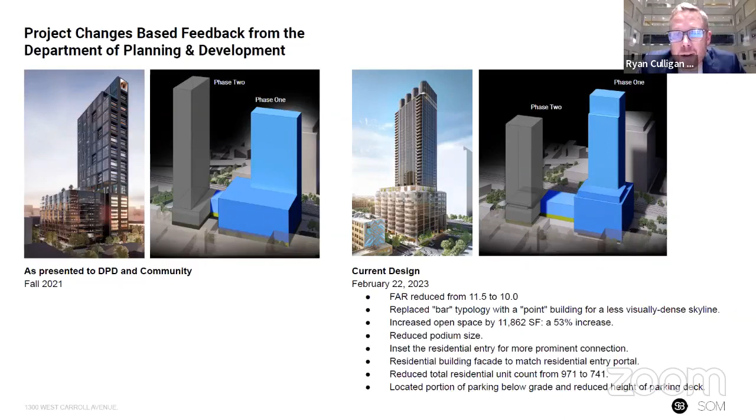And a portion of the parking has been relocated to below grade as a way to improve the public realm.

The project is positioned in the northwest corner of the Fulton Market District. It's bordered on the west by Ada Street and Ogden, on the south by Carroll Avenue, and on the east by Elizabeth. To the north are the Metra tracks.

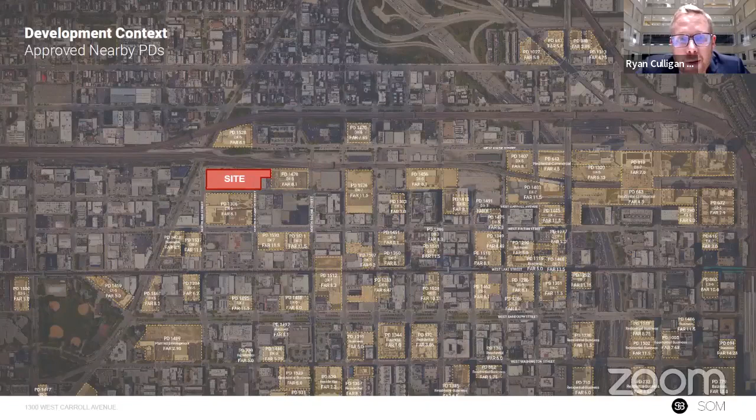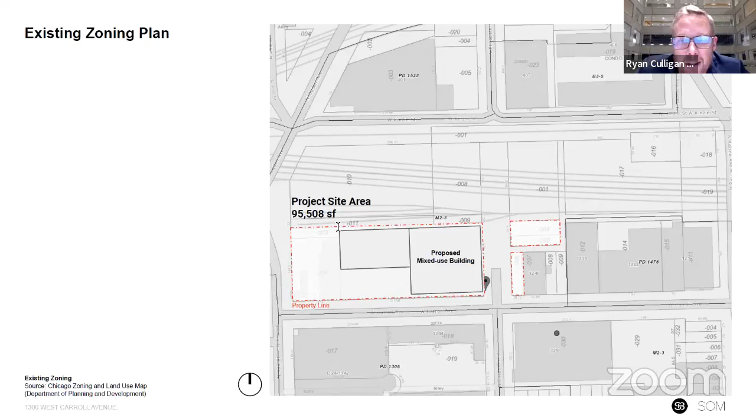We're proposing a phased mixed-use development. There would be 2 phases for this project, and the design you're going to see tonight focuses on phase 1, the first phase we propose to build. That phase is biased to the east and north of the site, as shown in this diagram, and it's a mixed-use building that includes at the ground floor some retail, lobbies, amenities, a residential rental building, and an office building on the south of the site. We'll talk a little bit about what those designs look like.

With respect to the massing and site planning for the development, we've created a few images that give context to the bulk and form of the development within the neighborhood, showing both existing and approved planned developments. One of the things we've endeavored to do, and are quite happy with the results, is to shape the buildings, the skyline presence, and their roofscapes to key into key datums in the surrounding context.

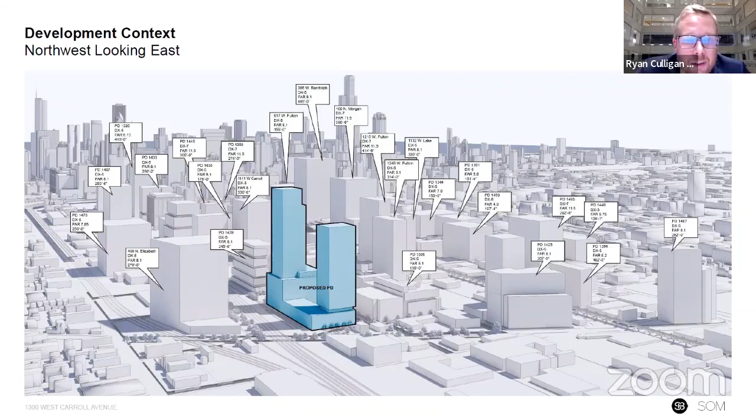The buildings step down towards the west as they move towards Ogden. They're spaced as far apart as they can be on the site to create as much air and light between them. That light is driven down to the public realm. And the buildings are compact in shape to create points on the skyline rather than walls on the skyline.

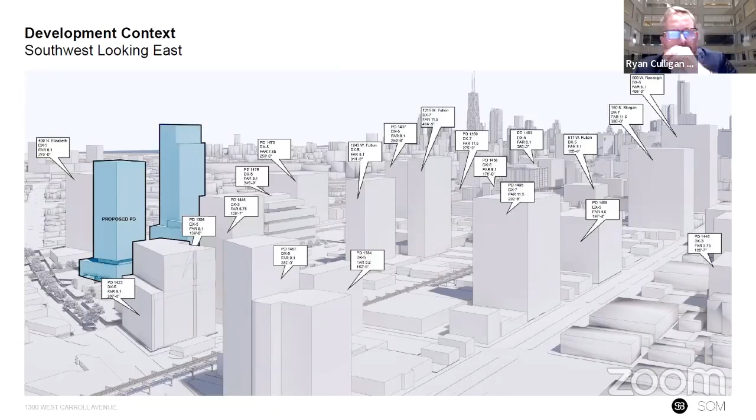The site has gone through some significant developments, we think, for the betterment of the public and the vitality of the pedestrian environment along Carroll and Elizabeth. On the left, you can see the site plan presented back in fall of 2021. I'm going to train your eye to a few things to orient everybody: Elizabeth Street to the right, the tracks off the page to the north, Carroll to the south, and Ada to the west.

The light blue color is the proposed phase 1 development, and the darker blue color is the proposed phase 2 development. On the left is what we had shown a couple of years ago, and on the right is what we propose tonight.

One of the big differences that has developed, in conversation with both the community and with officials from the Department of Planning and Development, has been the increase of the public realm. The plaza you can see here is significantly larger now than it was before, as these buildings have been moved further apart.

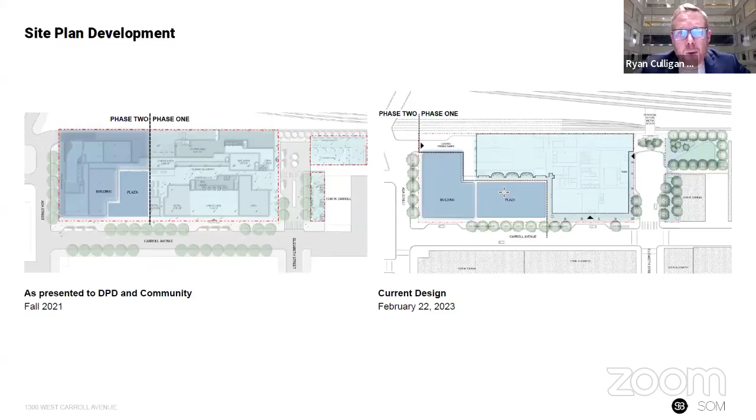To talk a little bit about the functions of the ground floor, you can see that in phase 1, part of the development will be a new pocket park accessible to the public off of Elizabeth Court. A sizable pedestrian sidewalk connecting Carroll to that park is part of this design proposal.

To the west of Elizabeth Court would be the phase 1 development and the above-grade structure. An office building would be accessible from the south off of Carroll, and the residential entrance tucked more quietly on the edge of Elizabeth Court.

All vehicles, that's all passenger vehicles and all service vehicles, will intentionally be brought in from the northwest corner of the site. This is done to make the pedestrian and public realm surrounding the entire development as safe as possible. You can walk from edge to edge across the entire site, all the way to the Elizabeth Green, without ever having to cross traffic. This is one curb cut on the northwest.

I'm going to bring us all from the ground up through the typical levels of the development to explain where the program is, the different uses, and how they work. One thing to keep in mind, and we'll talk a little bit about this in the coming slides, is that as a project team we've endeavored to create public, active front-of-house uses.

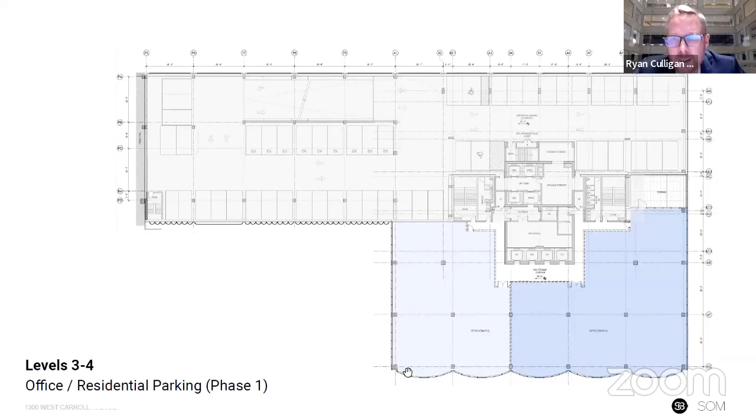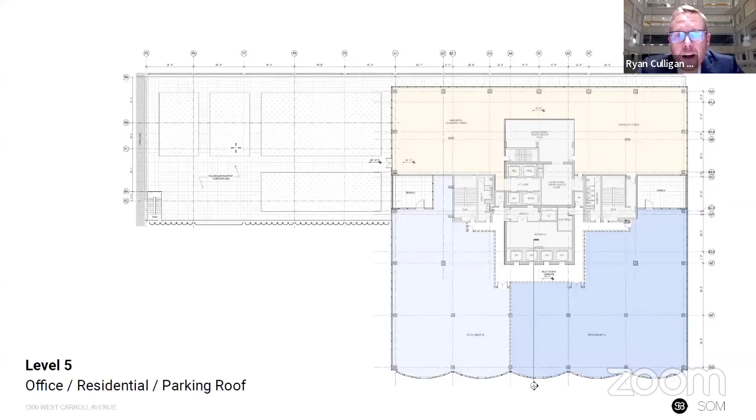Once we get above the parking podium, the footprint of the building that rises above is split in its use. It's a true mixed-use building with office on the south and residential amenities on the north. Building tenants would have access out onto the rooftop of this parking podium.

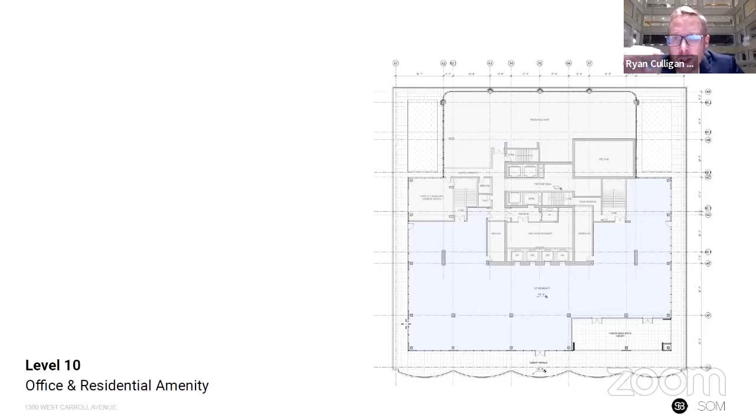We've tried at every step along the way to design in accordance with the West Loop design guidelines, and we've highlighted a few of the guidelines which we think really strongly incorporated into the DNA of this project.

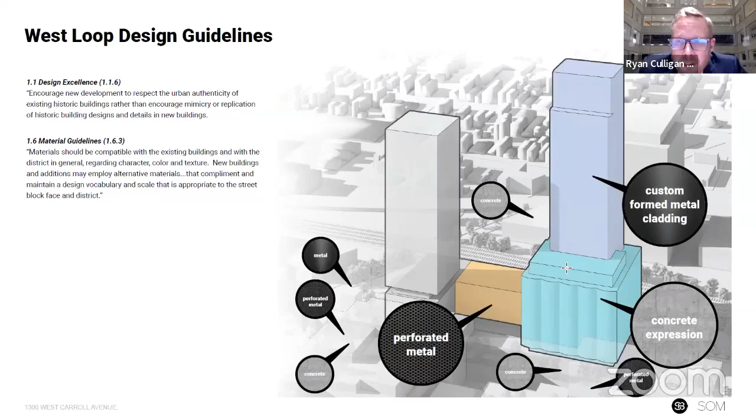One of the ways that we are in accordance with the West Loop design guidelines is through material. The guidelines call for a respect for urban authenticity and the existing historic character of the neighborhood. The site, a former Archer Daniels Midland wheat mill, has also informed our material selection. Different elements of the project use a concrete expression, a metal formed cladding expression, or perforated metals. We think this palette of materials is both respectful of the site's history and quite compatible with the surrounding neighborhood.

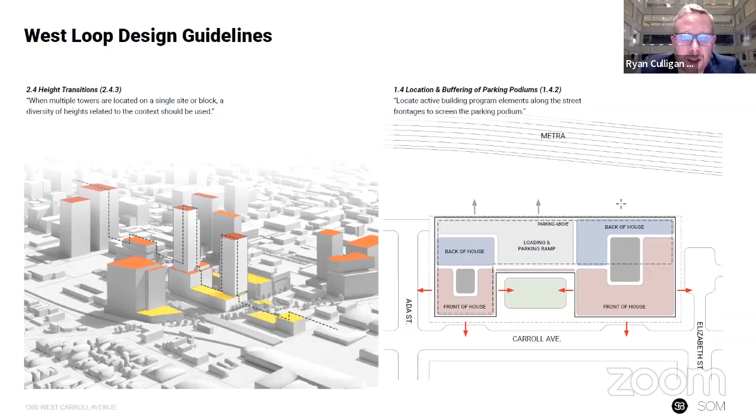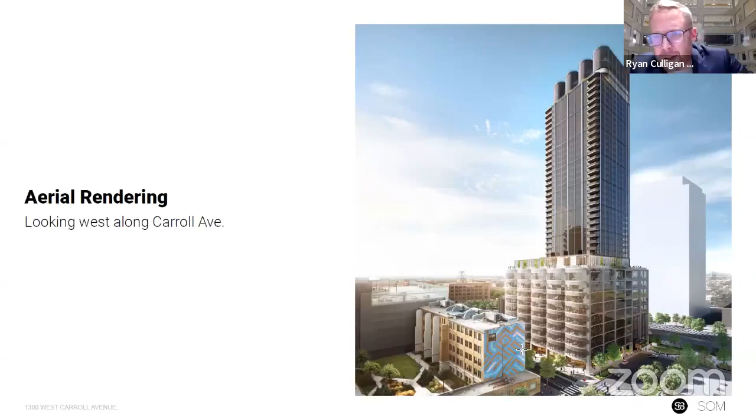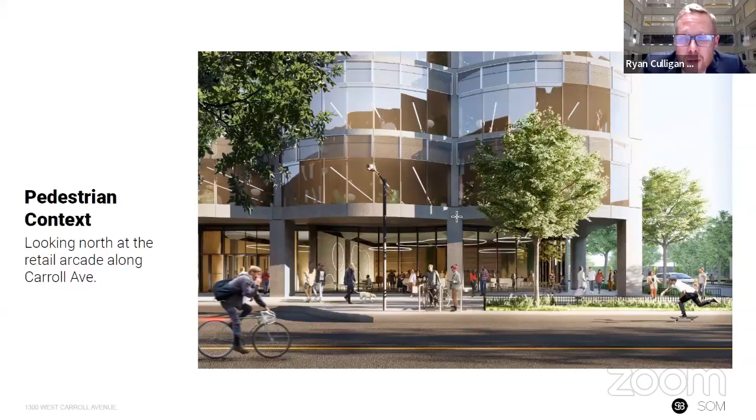Here's an elevational detail of the office building we're proposing, with bay windows reminiscent of the silos from the site's past. That concrete expression—raw, but we think also refined materiality—is intentionally relating to the neighborhood context, and we think it belongs to the neighborhood in a way that is complementary and respectful.

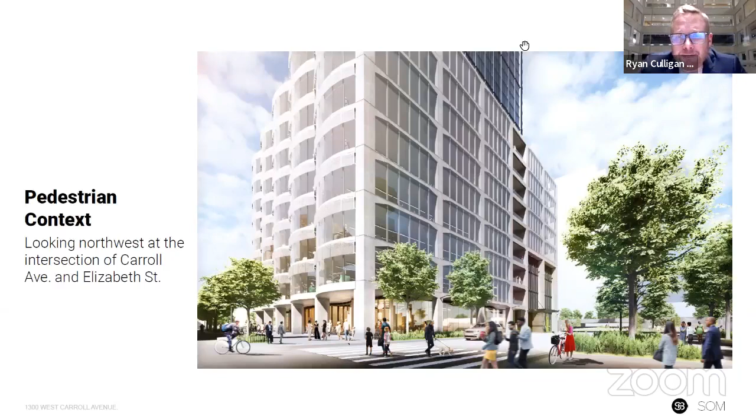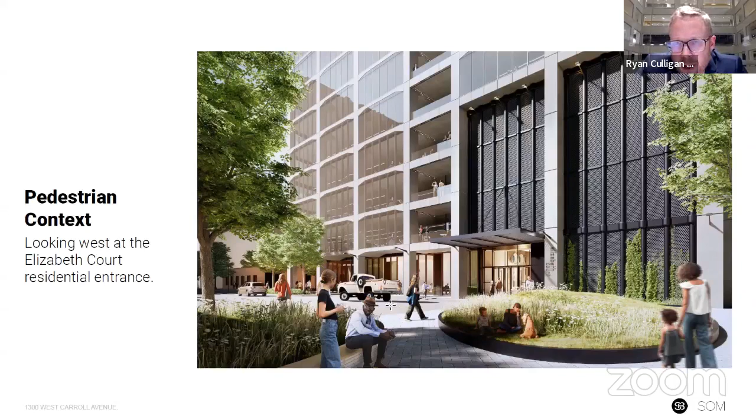Over our back right shoulder is the provision for a potential connection to a future Metra station, to the north of the development, outside the property line. The design for this pocket park has been done such that it is conducive to recreational activities, picnics, as well as the incorporation of diverse native grasses and plantings.

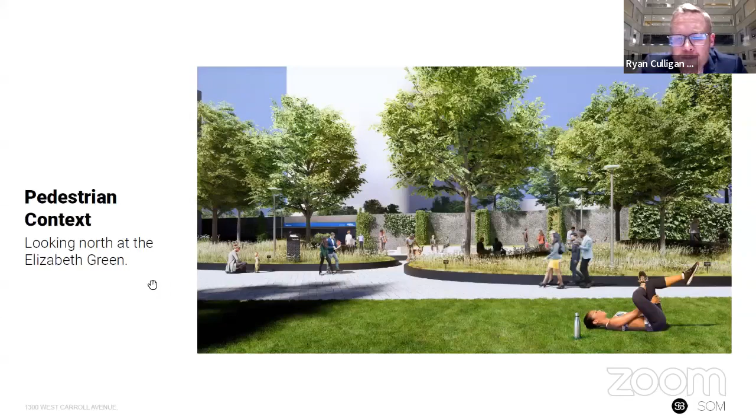Sidewalks have been designed for ease of movement, flexibility, and safety. With that, as an overview of the project, I'll kick it back over to Fred and the Sterling Bay team to talk about the community benefits.

In addition, as Ryan mentioned, some of the revisions we've made along the way include a more than 50% increase in the amount of open space this project will deliver, a reduction in the podium size, and relocating some of the parking underground. With that, we are happy to turn it over to questions.

I'll jump in and MC the Q&A. The first question, which I think Ryan addressed just before you spoke about the design, but in case you have anything to add, is from Butler Adams: are we really trying to copy the silos that were demolished, with form not following function with those curves? As I said, I think this came through right before, but in case you had anything to add specific to this—yeah, sure.

I would rephrase—I don't think we're trying to copy the silos, I think we're inspired by them. We're trying to take a beautiful geometric form and find use for it. Those bay windows have utility, they have value. They take gazing directions on the south of the building and push them up and down the long avenue of Carroll. What they also do, as you're walking along Carroll, is create an object of interest on the facade that catches light in a beautiful way, making the building facade feel special. So it's doing things beyond just trying to replicate what had been there. We're quite excited about the spaces it will create both inside and the facade expression it will have on the outside.

Oh sorry, Armando, I see your hand up. Yeah, I wanted to say a couple things in response to Butler Adams' comment. I actually like the nod to the old, to the past here. I appreciate Ryan's response to that, but I saw it as a positive, as a way to give a nod to the past. I wanted to respond to that.

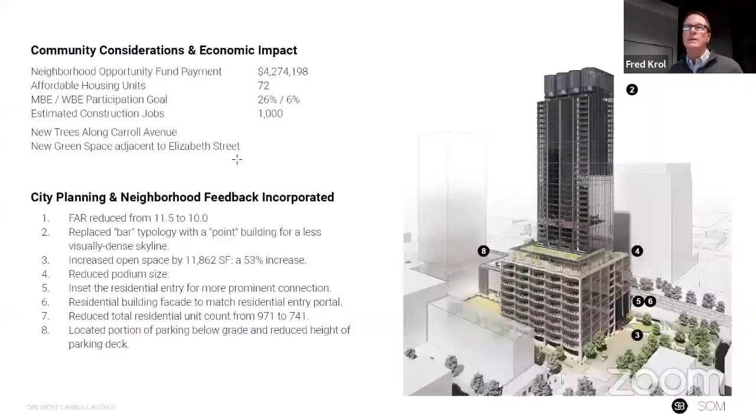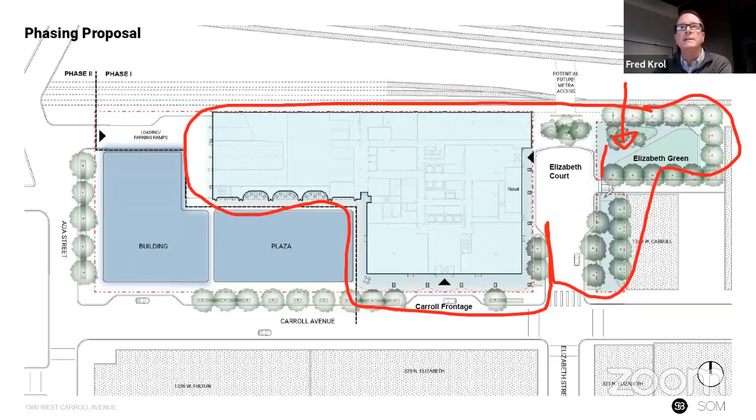Okay. I had one more question in the chat. It's don't go far, Alderman.

For the Alderman from Butler, I know there are plans for a Metra stop with the West Loop, Fulton Market area becoming a second downtown. Has there been thought of adding a stop at Elizabeth and Ada? I don't know, not that I know of, Butler, but they're studying. Right now they're just doing a study on a stop. There's a long way to go for a stop. So we're working in coordination with Metra and all of those folks, and planning put forth a study, and we're trying to wait and see how this is going to go and when things are going to start happening.

And the community will be advised when it does. If I'm not mistaken, the idea was that a stop was going to be potentially at Ashland and Kinzie, and then ingress and egress was going to also be at Ogden and Kinzie. And then Butler clarified, Alderman, that he meant a new L stop at Elizabeth and Ada. I don't know if you've heard anything about that. Not at all. Okay.

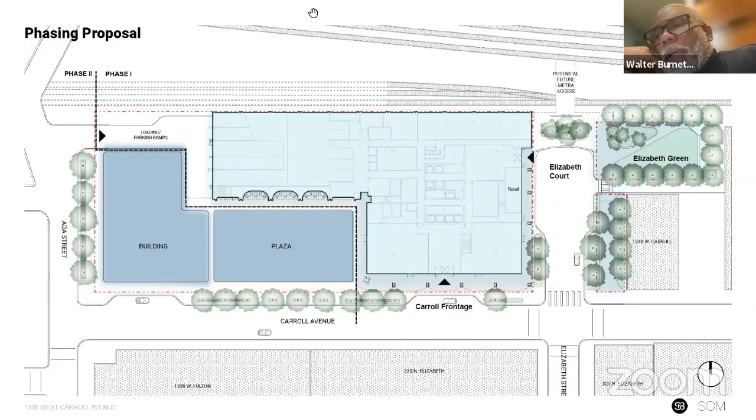Yes, if I'm not mistaken, the Department of Transportation is looking at all the streets going north and south between Ogden and Halsted Street. We have challenges with Green, with Racine, Ada gets real tight, and it also gets tight between Lake and Fulton. So we're looking at potentially making some streets one-way. We're having those conversations, and hopefully sooner or later we'll bring transportation to the table and they'll show us what they've come up with. They've been working on it for a while. Some of these streets, like Racine and Ada, if two cars go down, one car's got to stop, it gets real tight.

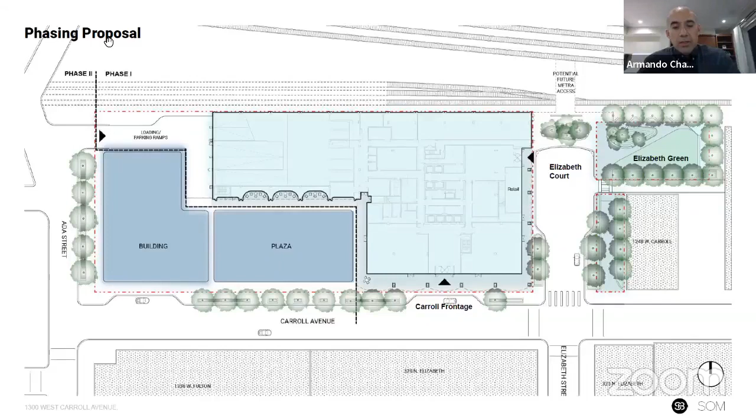And Green Street is pretty much the same way in some areas, so we're looking at all of that — maybe even rethinking where parking is allowed and so forth. But anyhow, thank you for that, Alderman, I appreciate it.

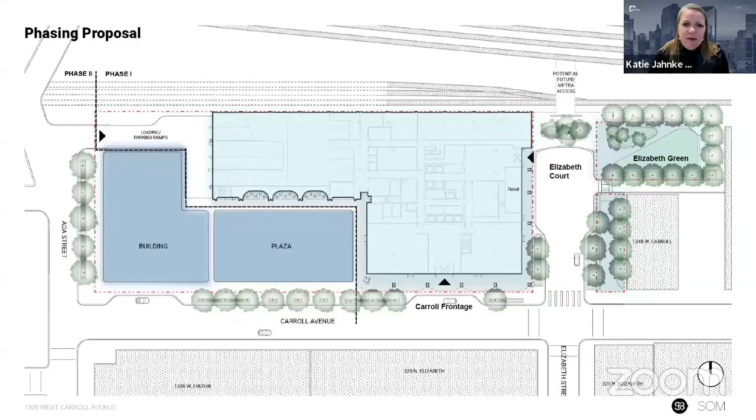The next comment, from an anonymous attendee — I think it's a question but also kind of a comment — is: can we advocate for CTA to begin considering an L stop at Elizabeth? Elizabeth and what? Yes, there would be Lake.

I'm having a fight right now trying to get them to put a stop at Halsted, so we'll take that under consideration. I'm having strong discussions about it, but you can look at it.

Any other questions or comments? We have one more from Butler. You want to go ahead, Katie? I'll read it for everyone's benefit. Butler said: personally, I hope there's consideration for restoring the original density unit count and increasing the height for phase 2. I'm getting 600 feet at 420 North May, and I want that topped.

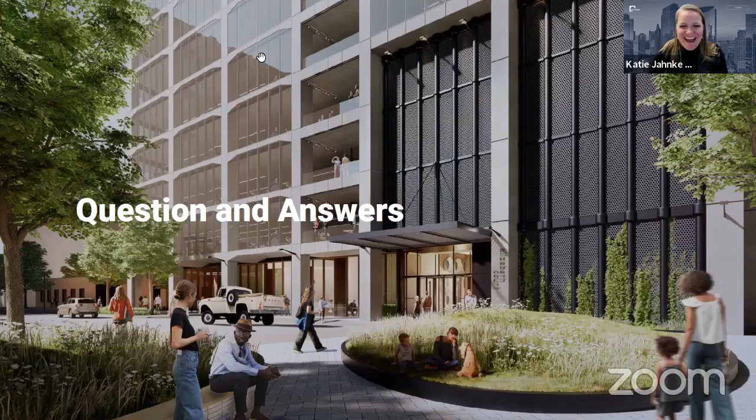Well noted, we appreciate the comment, Butler. Keep in mind there is a phase 2. I'd imagine, Butler, as you know, I don't know of too many developers who try to do less — they generally try to do more. And I know planning also tries to do more. So I'd imagine it must be something economic for them to have brought it down. I think that's between them and their investors, I guess.

I just want to note and say I appreciate Butler's passion for our neighborhood. Butler, you should live here, man — you know this neighborhood well. Appreciate your input.

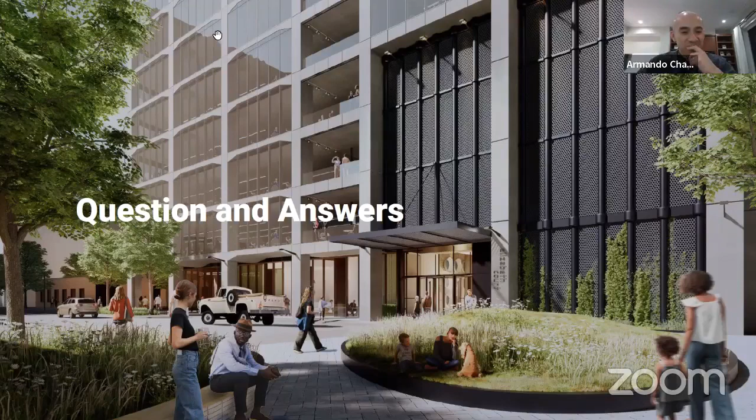Okay, well then on that we will go ahead and wrap up tonight's meeting. We will have this posted on all of our outlets for further review and follow-up.